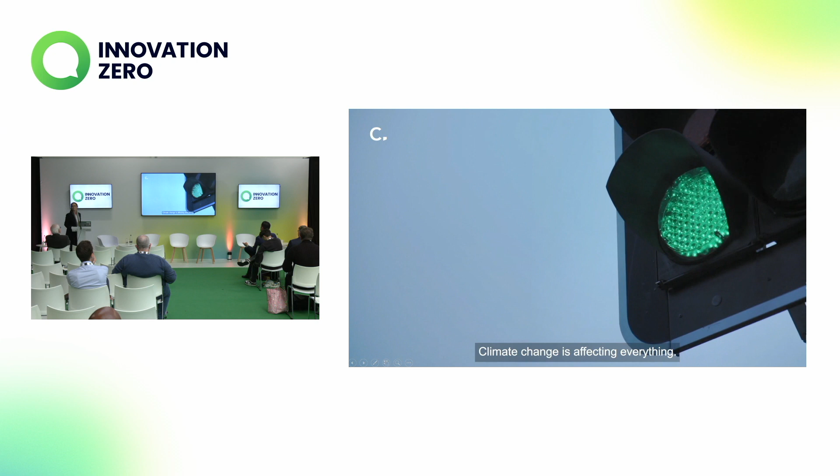Climate change is affecting everything. It's shaping our cities, our economies, our landscapes, the way we think, and us. From the micro to the macro. How we move, how we live, and how we make our way in the world is adapting.

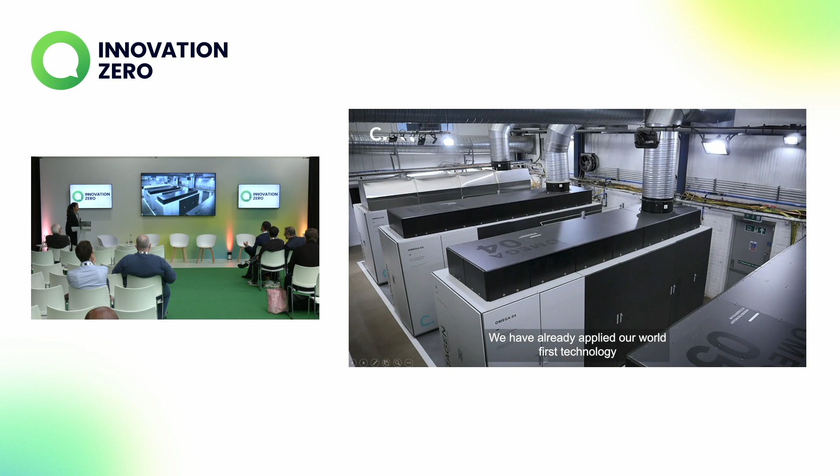Catagen's commitment is to clean and decarbonise the air. We've already applied our world-first technology to emissions testing in the mobility sector. As an innovation company, we then asked, how can we decarbonise industrial systems, shipping, aviation, and agriculture? We had to look directly at energy. We had to think about scale and find a collective solution that would cut CO2 emissions and enable a move away from fossil fuels, to cleaner energy sources.

With ingenuity, talent, technology, and a united sense of purpose, we developed ClimaHtech. ClimaHtech is a decarbonisation acceleration system using advanced climate technologies to produce green hydrogen and e-fuels. Our core technology is active and scalable. Industries need to decarbonise now. The planet needs climate security. By adopting efficient green hydrogen energy powered by renewable sources such as wind and solar, we can help fulfill net zero pledges across multiple sectors and industries.

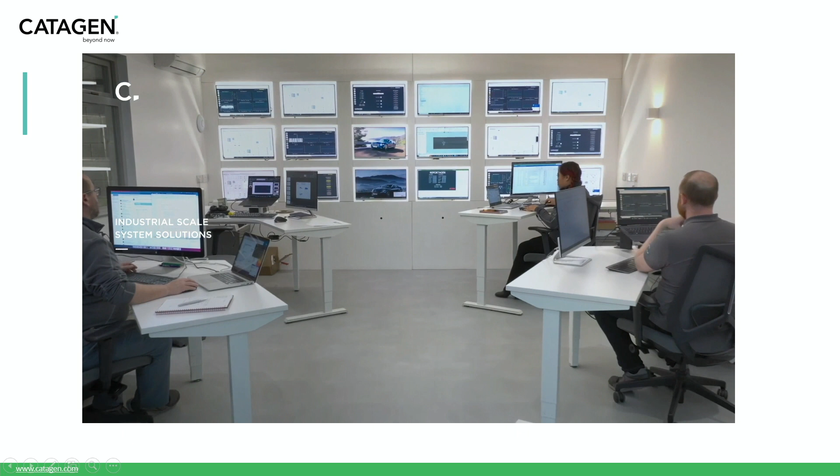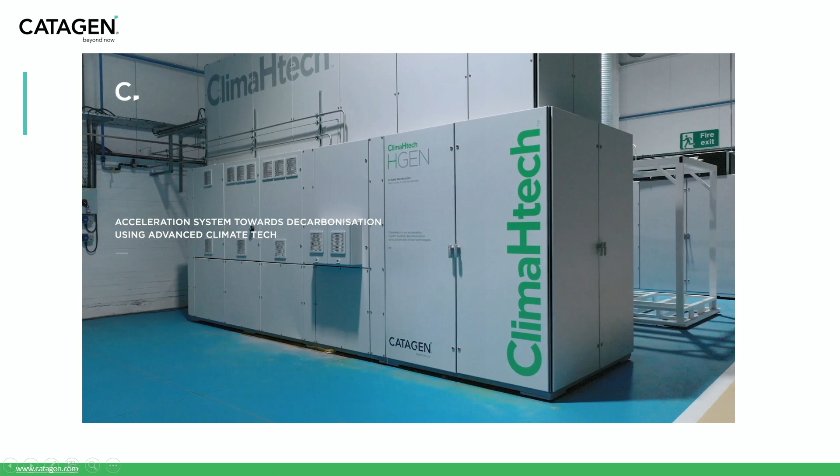ClimaHtech is an acceleration system towards decarbonisation using advanced climate technologies. It is a platform to generate green hydrogen, biohydrogen, and green e-fuels with complementary systems for carbon capture and hydrogen compression.

This innovation utilises Catagen's patented recirculating gas reactor technology to create a highly efficient green hydrogen generator. Renewable energy powers the ClimaHtech H-Gen to produce green hydrogen with no harmful byproducts. Catagen do not use electrolyzers to free hydrogen. The H-Gen uses a multi-stage chemical process to split water into hydrogen and oxygen. The oxygen produced can be used in other industrial processes or released back into the air.

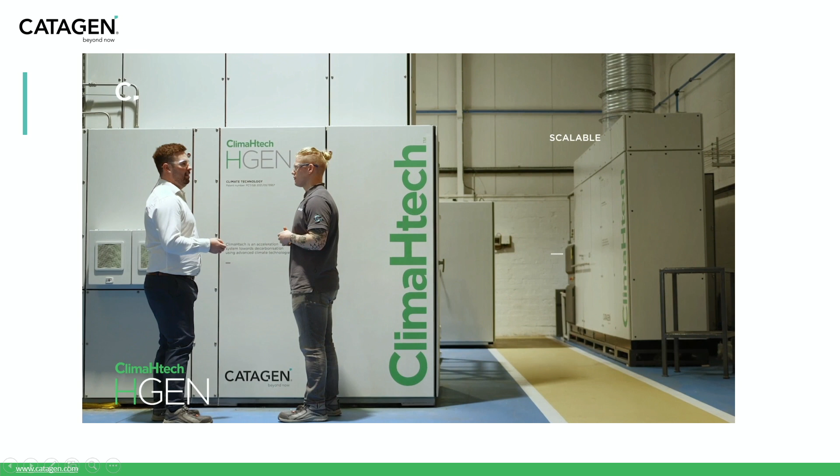The ClimaHtech H-Gen system is designed for industry and has multiple benefits: scalable, cost competitive, more energy efficient through utilisation of waste heat sources, easier to manufacture using existing supply chains and processes to cut complexity, time and cost, and produces renewable fuels from wind, water and air. These technologies can be deployed on-site anywhere globally with access to renewable energy.

Green hydrogen can be used to create an energy-dense e-fuel. The ClimaHtech e-fuel gen uses our enhanced recirculating gas reactor technology to create a cost-effective and easily transportable e-fuel. Powered by renewable electricity, it combines green hydrogen and carbon dioxide removed from the air to create a carbon net zero, green hydrogen based fuel. The e-fuel can be used in conventional internal combustion engines, allowing it to be used in vehicles until the end of their full useful life, or in difficult to decarbonise industries. Catagen green fuel can be produced at a renewable energy site alongside green hydrogen production.

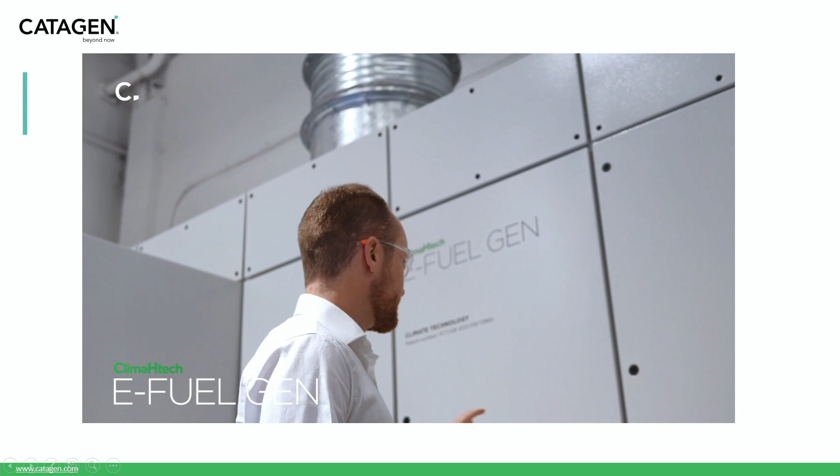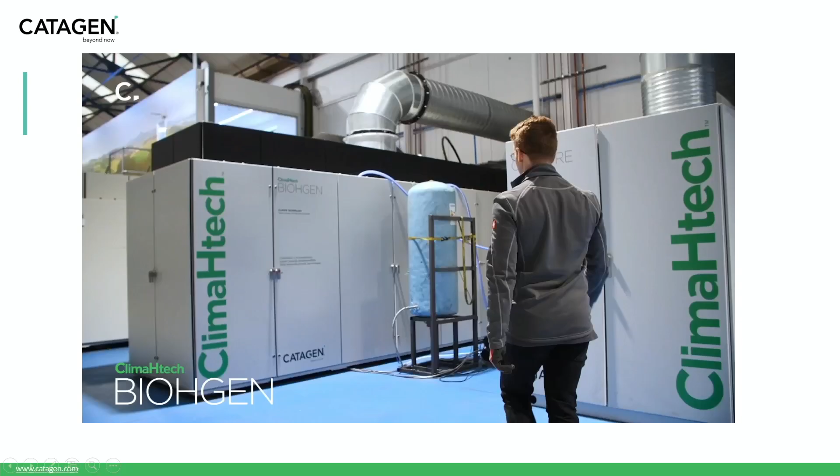ClimaHtech's BioHgen uses Catagen's proprietary technology to produce cost-effective, low-carbon biohydrogen from a waste biomass source. This energy-efficient approach can facilitate the early adoption of low-carbon hydrogen and accelerate the route to a net-zero hydrogen economy. Bio-CO2 is a valuable byproduct of the process.

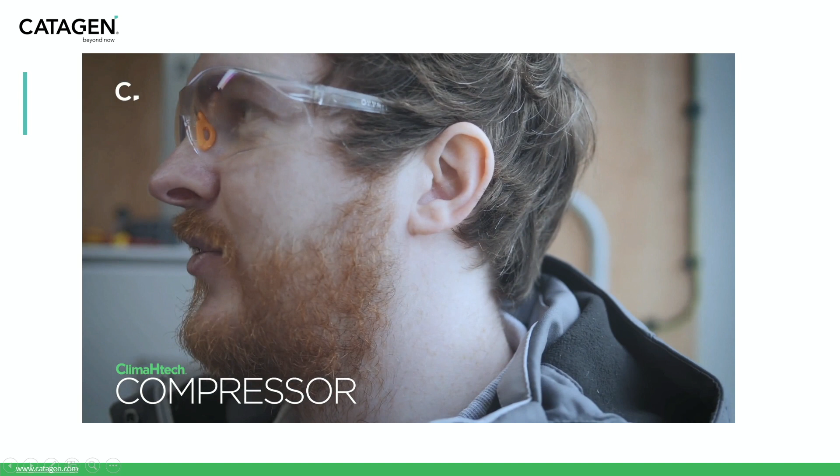Alongside production, Catagen is also developing the ClimaHtech compressor, a high-pressure hybrid system for compression, dispensing and storage. Current methods are inefficient, expensive to manufacture, and display various operational issues in use, such as overheating and long duty cycles. Catagen's ClimaHtech compressor maximizes available fuel usage and has improved thermal efficiency, contributing to lower capital costs.

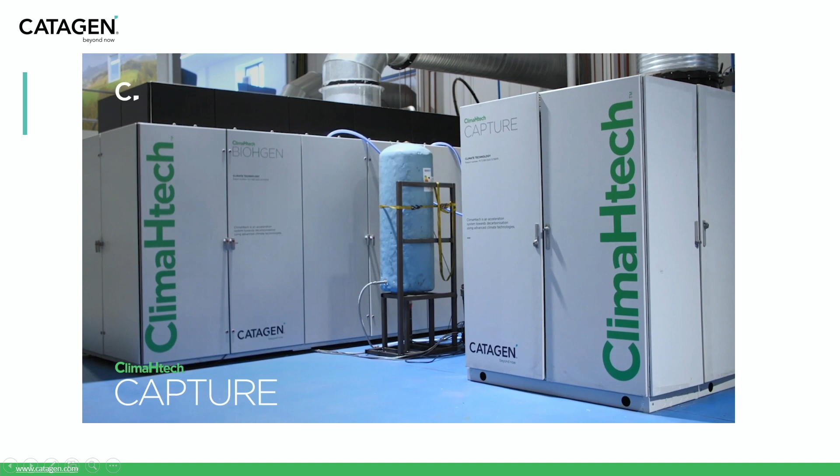ClimaHtech capture uses low-grade waste heat to capture carbon dioxide, resulting in very low operating costs. It has also been designed to work in tandem with other technologies, such as ClimaHtech H-Gen, to provide the green hydrogen and carbon dioxide essential for making e-fuel. ClimaHtech capture can also be used to remove CO2 for other purposes. Another fantastic thing about it is its versatile design, which can be used for a wide range of applications.

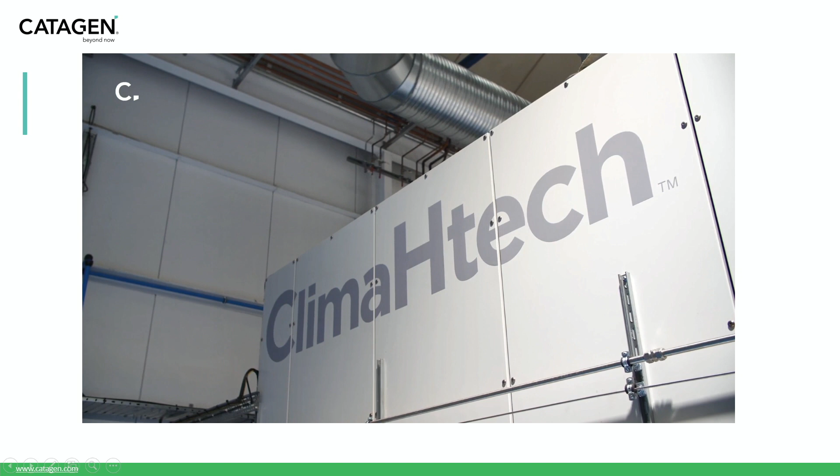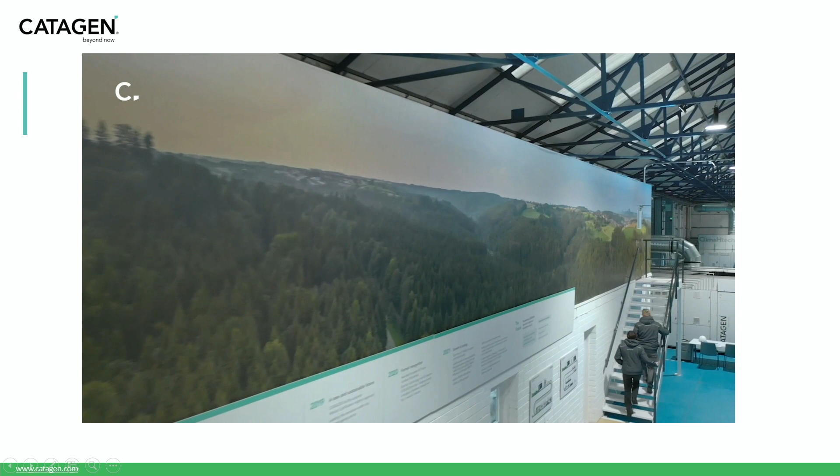Industry has to change, and become cleaner, cutting its carbon dioxide emissions to zero. Green hydrogen and e-fuels can be used to replace fossil fuels in sectors such as manufacturing, transport, power, mobility, and agriculture. Working in partnership with the UK government and industry leaders, our goal is to accelerate the shift away from fossil fuels to cleaner, greener energy, helping to decarbonise and reduce emissions in the most challenging sectors of industry.

As you can see, last year we were incredibly busy building those 5 prototypes. Now our focus is on bringing the technologies to full-scale demonstration. 3 of the technologies will be at full-scale demonstration in 2025: the biohydrogen generator, the e-fuel generators, and the hydrogen compressors. I'll talk a little more about each technology in turn.

As I've already said, we have a lot of experience working in the automotive sector, but last year we had about 115 visits to Belfast from companies interested in our technology, ranging from data center companies, cement, glass, steel, and energy and pharmaceutical companies, all interested in hydrogen and e-fuels like e-gasoline, SAF, e-kerosene and e-diesel.

Our green hydrogen generator is not an electrolyser. This is a completely different process to create green hydrogen from renewable energy - we can take wind or solar. We can also use waste heat in our process, which limits the amount of renewable energy needed into the system to produce green hydrogen and oxygen.

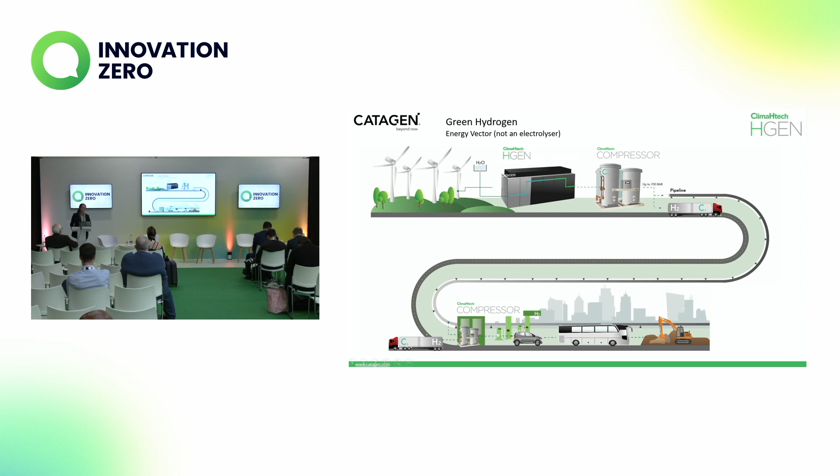We're also working, and we were really pleased to announce that we did a joint bid with ESB, the energy company, on seabed rights off the coast of Scotland. We were successful at getting 100 megawatts of seabed rights, and our part of that project is sustainable aviation fuel.

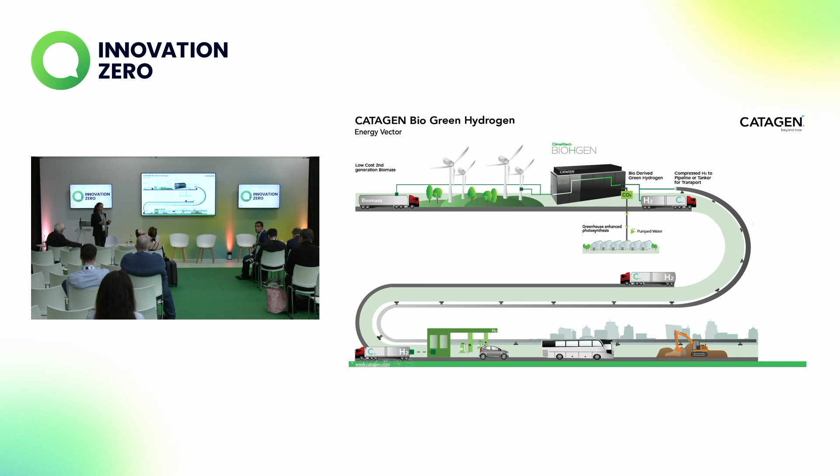So we're very different to some of the startup companies out there. We're sort of in control of our own destiny at the moment. We're looking at the structure of Catagen. When you go to these pitching contests, they ask what do you need most - customers, revenue, investors? What's the all of the above?

We have a core business unit that's revenue generating, and then we have 5 new technologies which will become separate business units. We have companies coming to us about the hydrogen compressor because there's lots of issues with hydrogen compressors in the market. They realize what we're doing, they've come to Belfast, seen the compressor, and really like what we're doing. The next conversation is: one, we'd like to invest; two, can we help you manufacture and scale this and bring it to market fastest? So we're really interested in having lots of conversations to get those collaborations and partnerships in place.